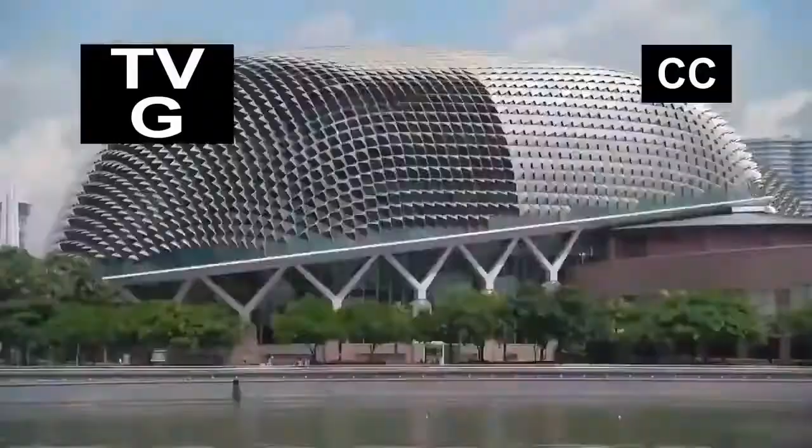I'm an architect, and I've spent years traveling the globe investigating incredible feats of architecture. And right now, I'm going to take you behind the scenes of one of the largest construction projects in all of Asia.

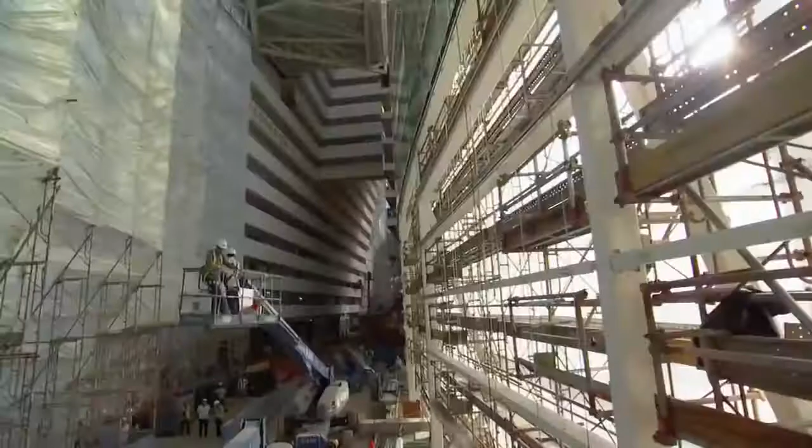Singapore is reinventing itself. This small island nation is attempting to finish one of the most audacious buildings on the planet. It's the country's first casino, 3 skyscrapers, covering 9 million square feet, and topped off by an engineering masterpiece, the first ever Sky Park. Longer than 3 football fields, with gardens, swimming pools, and restaurants, all higher than the Seattle Space Needle.

We're actually in the pool right now. We're in the pool. This is the view from the pool. Wow, it's pretty spectacular. That is amazing.

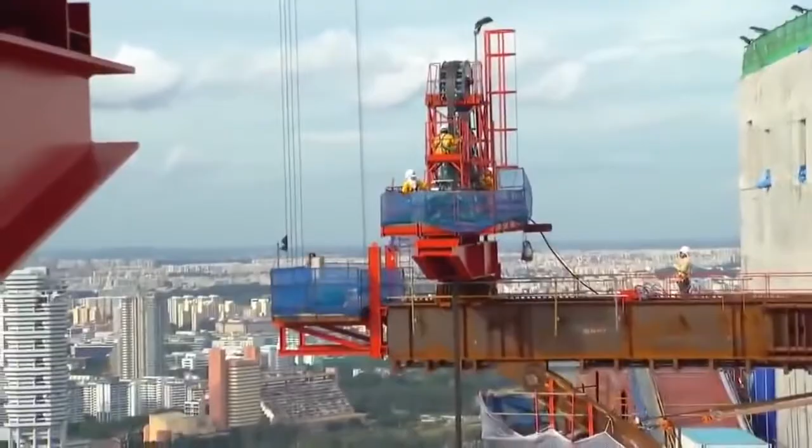To finish it, crews must perform some of the highest and heaviest lifts ever attempted. I mean, you're putting a piece of steelwork the size of an aircraft carrier on top of 3 towers. They tackle one of the largest paint jobs on the planet — you would never do this in America. And erect one of the longest cantilevers in the world, 200 feet out over nothing. Oh my God, that's enormous.

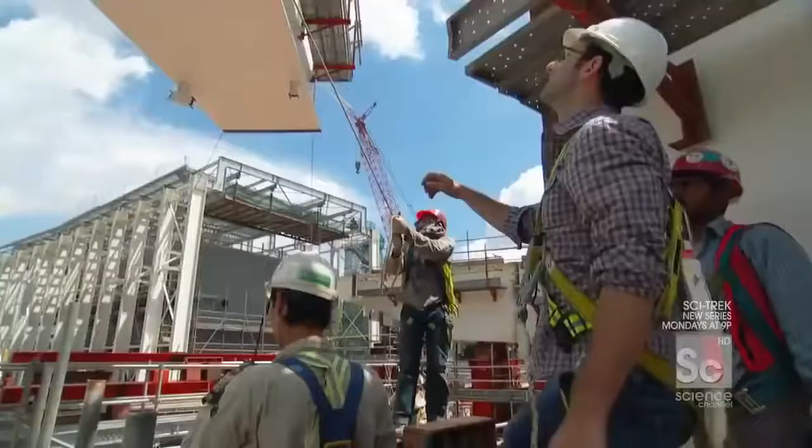I'm in Singapore, a tiny island nation with less than 5 million residents. In fact, the entire country is smaller than all of New York City. Located at the southern tip of the Malay Peninsula in Southeast Asia, the main island of Singapore is both a city and a country, one of the most densely populated in the world.

Culturally speaking, it's a somewhat strict and buttoned-up environment. Chewing gum is against the law. Insensitive behavior is punishable by fine. And if you're caught vandalizing a building, you quite literally get hit with a stick.

But despite this conservative cultural backdrop, Singapore is attempting to reinvent its image by doing something totally surprising. They're going to open a massive casino.

With no natural resources of its own, Singapore is risking $5.5 billion in hopes of cashing in on the gambling boom exploding across Asia.

It's a pretty significant gamble because for Singapore, you've never had gaming before at this scale. You've never had a resort at this scale. You're taking a kind of a major leap. Yes, it's certainly a transformational project for Singapore, where you hope to actually not just double, but triple the tourism receipts. That's big.

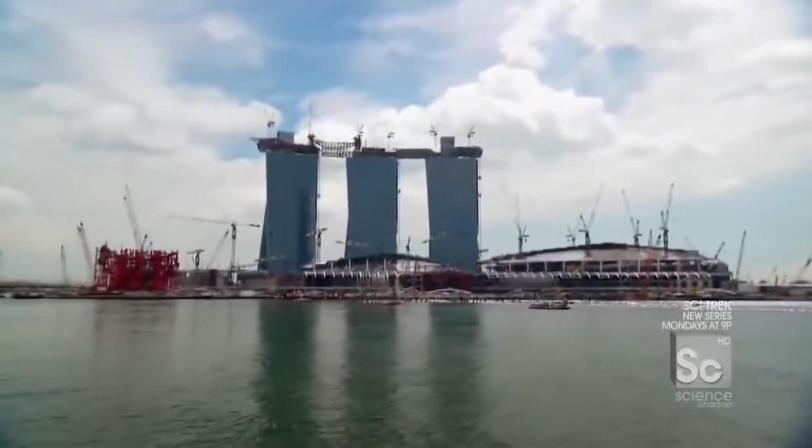The centerpiece of this giant transformation, the Marina Bay Sands. One of the biggest and most expensive casino complexes in the world. Unlike any hotel and casino ever built.

Rather than just being kind of a traditional hotel and casino that we might find in Vegas, instead, we have a museum, theaters, retail, a casino, a massive convention center, 3 incredible hotels, and all of that capped by the first ever Sky Park. That is absolutely right. The Sky Park on the very top will become the icon of Singapore, we think.

In a move that has never been done before, world-famous architect Moshe Safdie put a park across the top of 3 massive skyscrapers. An 1,100-foot-long urban oasis with tropical gardens and one of the longest swimming pools on Earth, all of it perched 55 stories above the ground.

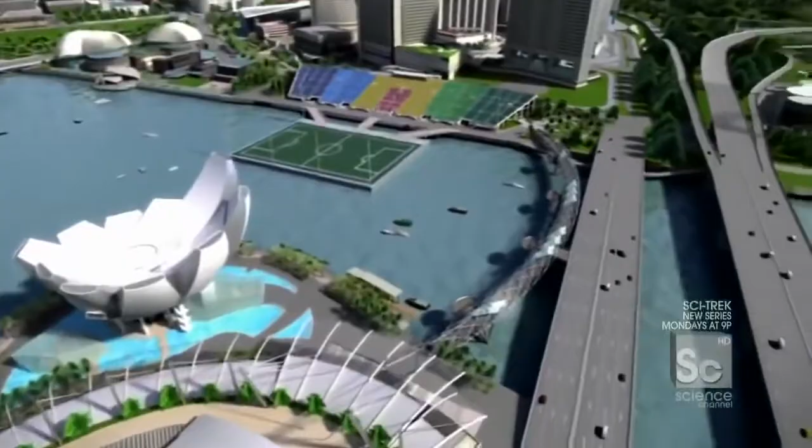So, Brendan, how do you describe a Sky Park to people? I mean, it's just a fantastic structure. I've never seen anything like it. There's 3 55-story towers, and you're putting a piece of steelwork the size of an aircraft carrier on top of it. So it's quite a feat.

And there's a park up there. There is. Well, there's more than that. There's observation decks and swimming pools and restaurants and all sorts of things. So it'll be a little city in itself.

The biggest challenge for builders: lifting 7,000 tons of steel, which is more than the main span of the Brooklyn Bridge, on top of 3 650-foot-tall buildings.

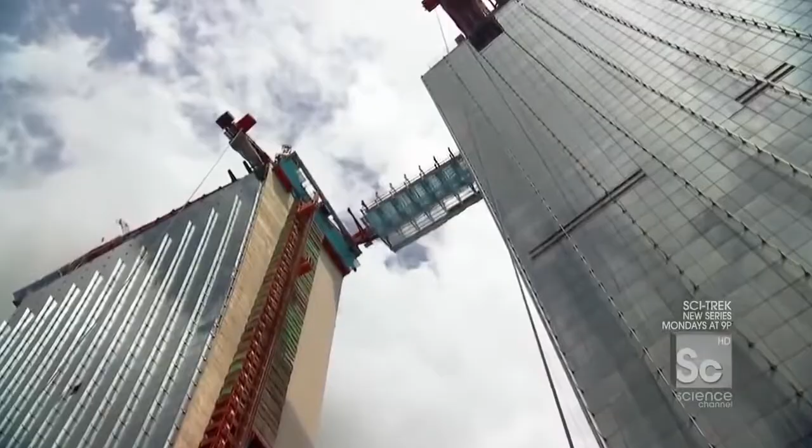To get it up there, the team divided the structure into 14 large but more manageable segments. 6 form the bridges connecting the towers, and the other 8 make up the observation deck, which sticks out 218 feet from the end.

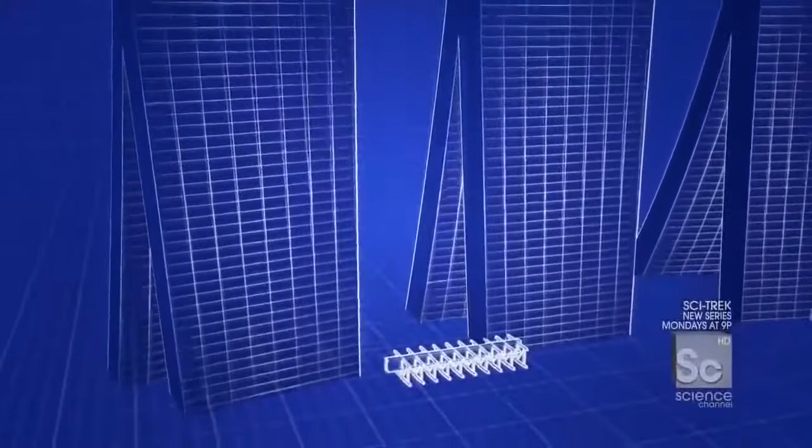And right now, crews are about to lift the second to last bridge segment, a massive 350-ton piece that will hang between towers 2 and 3.

It's a little after 7 p.m., and on most job sites, it'd be quitting time, right? Folks would be going home. But here in Singapore, we're about to begin one of the most critical lifts in the entire project.

That bridge segment right there, an over 350-ton chunk of steel, is about to get lifted up over 650 feet in the air.

I mean, in principle, this sounds crazy, right? Yes, we're actually taking a bridge, lifting it up, and putting it on top of 2 skyscrapers. This has never been done. Never done. So you got to be a little bit nervous to get this thing up.

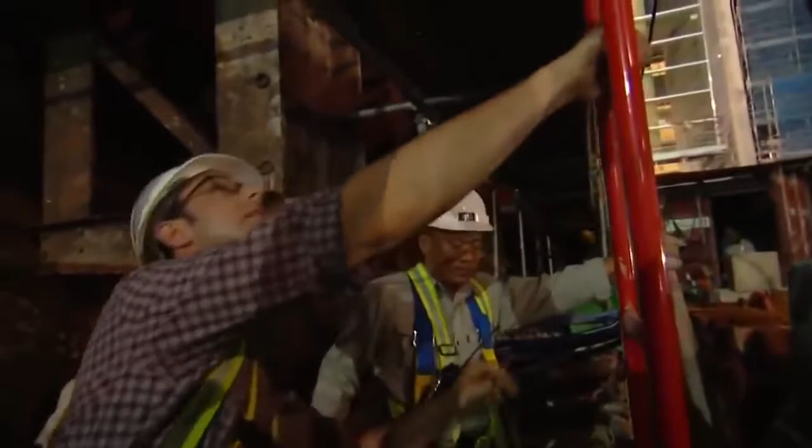Lifting this piece will take some of the strongest hoisting cables ever designed. They get attached to the very top of the segment, 5 stories up.

Now, at long last, I'm on the top of the whole bridge segment, and you really get a sense of its length. It spans all the way out between 2 full towers, over 150 feet long.

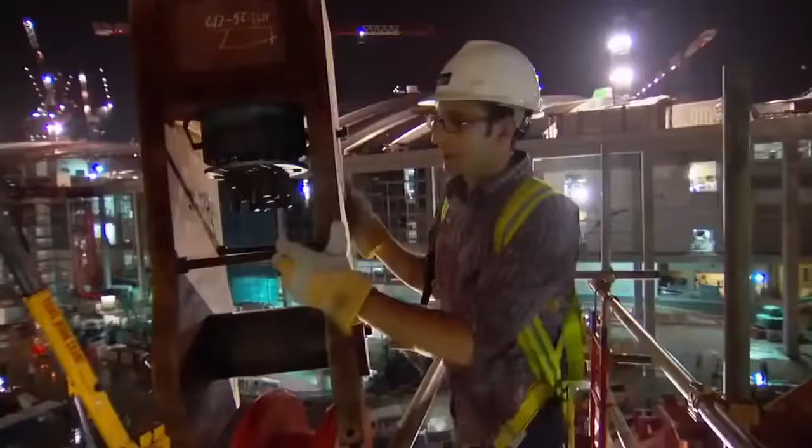This is what it's all about. This is the shackle coming down, over 600 feet up. Look at the amount of bound cables inside of this thing, just the density. It's 2 of these shackles, one on this side, one on that side. We're gonna lift up over 350 tons of steel.

An operator from the top of the sky park lowers the shackle down. There it comes, there it is. 960 millimeters. It has to line up within 1/10 of an inch for this 150-pound anchor pin to fit through.

Oh no, I'm stuck. Push, fight, come on, shake it a little bit. Hammer! Give it to me. Out here. You ready? Here I come.

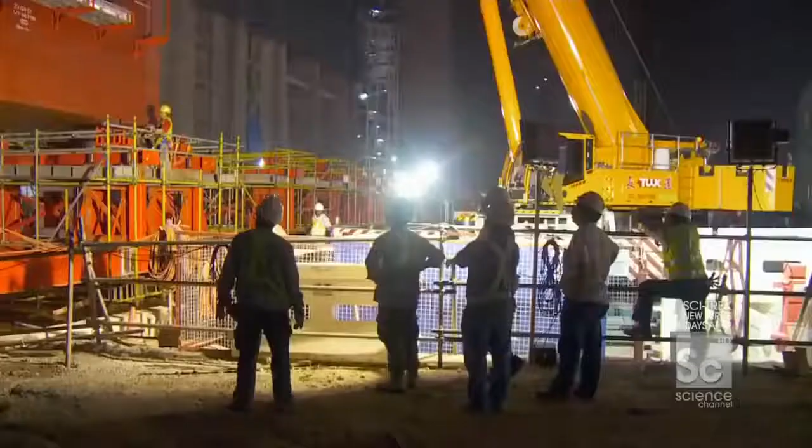Once the pins are pounded into place and the shackles are connected, there is one final step to make sure that the load is secure. Overnight, crews test the connections for 12 hours by hanging the segment just 4 inches above the support. If everything looks good, it is ready to go up.

Okay, she's floating. Yes, 4 inches off the ground. Ready for the lift? Yes.

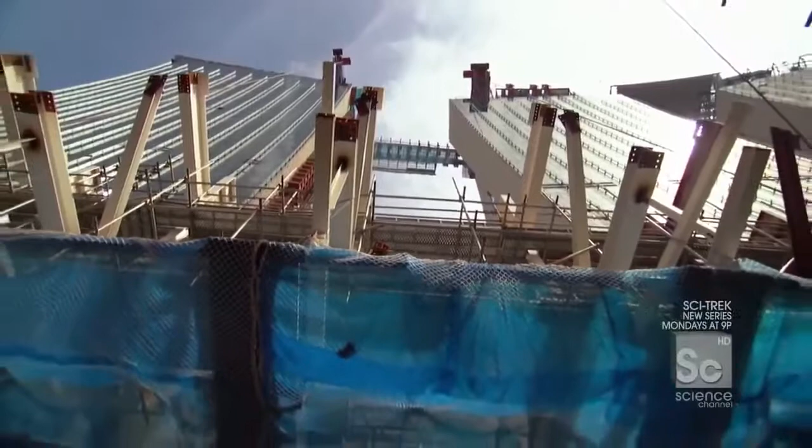How's the wind? If you can see it, it is swinging, and if it swings, it might hit the building. So when the lift begins, the concern is in a strong wind, like a pendulum, it could move and actually hit the building. Is it that close to the building? It is very close to the building.

Because of the curvature of the towers, this piece must pass within 10 feet of 2 glass skyscrapers on its way up. Any wind over 5 miles per hour is enough to call off the lift. So are we good? Are we ready? Yeah, good. So it's now okay to go.

Typically, crews would use tower cranes for heavy lifts, but this segment far exceeds their capacity. So instead, engineers are borrowing the technology from a different kind of construction: bridge building. Even the most powerful tower crane can lift about 20 tons. This thing weighs over 350 tons, not an option. So they went with something called a strand jack.

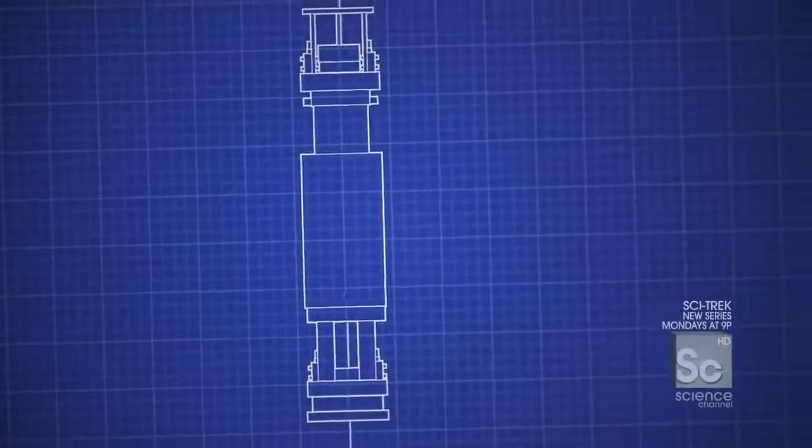To understand how it works, imagine 2 hands or clamps holding a rope. One hand locks the rope, the other brings the rope up, grabs the rope, goes back for more, and so on. Strand jacks work on simple hydraulics. A bundle of 22 half-inch diameter cables passes through 2 clamps. The top clamp grips the strands and moves up almost 2 feet. Then the bottom clamp locks the cables in place while the top moves back down for the next pull-up.

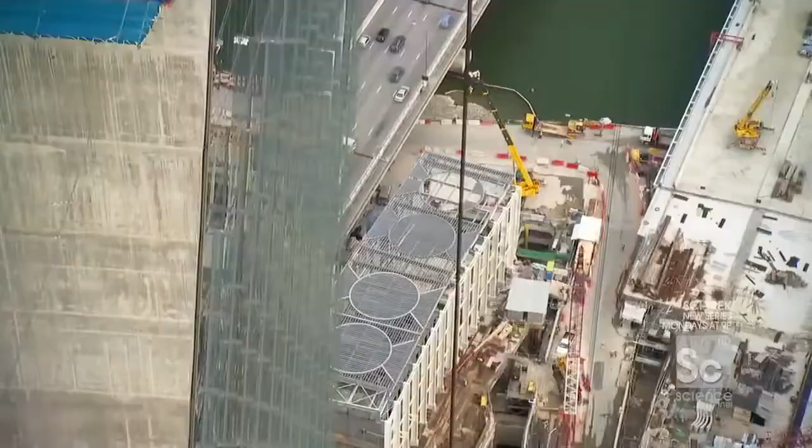It takes 2 enormous strand jacks to lift this segment, one on each tower. Combined, they could lift the Statue of Liberty. It's the first time this technology has been used to make lifts this heavy from the top of a skyscraper.

Tony? Danny. Welcome, Danny. Good to meet you. Good to meet you.

Tony, where am I standing right now? Well, you're on the Sky Park. So this is kind of where the action is. This is where the pool is. Right where we are now is the second swimming pool. We're actually in the pool right now. This is the view from the pool. Oh my God.

People will be able to swim out to the edge of the pool. And literally, there'll be no edge, right? It'll be an infinity edge looking out over Singapore. Wow, it's pretty spectacular. That is amazing.

And what's making all of this happen is this really just nasty-looking beam. That's right. So this enormous frame is supporting the strand sliding units.

Now, can we actually head up top to the strand jack? Yeah, we can. Let's go this way. The strand jack sits on a temporary support structure that extends 30 feet out from the side of the tower. So Tony, where we're walking right now, we're actually leaving the skyscraper below us and now heading out. We've just walked off the edge of the building.

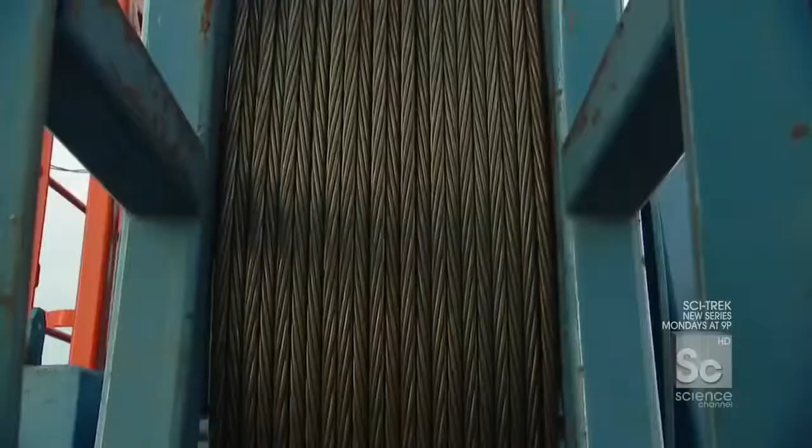So we're now standing perched out. There's no more skyscraper below us right now, there's no building below us. It's awkward. It takes almost 30,000 feet of cables to raise the segment, enough to cross the width of Manhattan. And if any of them get tangled, workers cannot lower the piece back down. So one of the most critical jobs on site falls to the cable manning crew here at the highest point of the sky park.

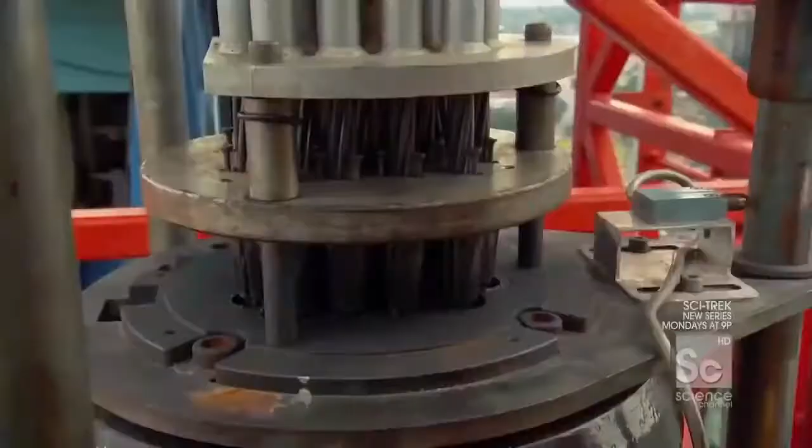Okay, so I am now standing at the very top of the strand jack. And you know that because right here, this is it, this is the top of the cables. And what we're about to do, every 30 strokes, they stop everything, clamp the lift, and spray some lubricant inside to make sure everything moves real freely. Unfortunately, I'm getting tasked with that role right now, so what do you got, some WD-40 we're doing this with? Look at this guy. Why is this the most low-tech thing in the world?

Okay, so now what we've done is we've taken the collar off, we've lowered the jack down, now we've exposed the cables to give us good access for some good greasing. Okay, Romley, how do you grease it up? Spray and pull out. Put in, spray, pull out. Go in, spray, pull out.

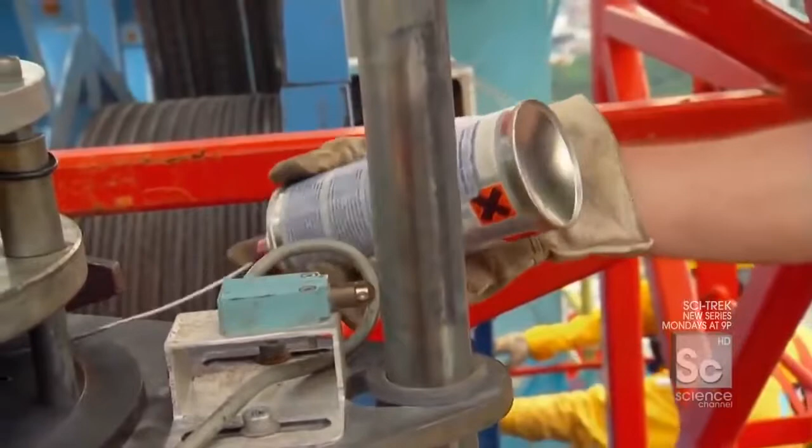You know, it's sort of humbling to have to climb up to this point, to have that behind you, to have to take a spray can like this, stick in, spray, pull out. These guys have to grease these cables once every hour for the entire night to get this segment up the final 500 feet to the very top of the sky park.

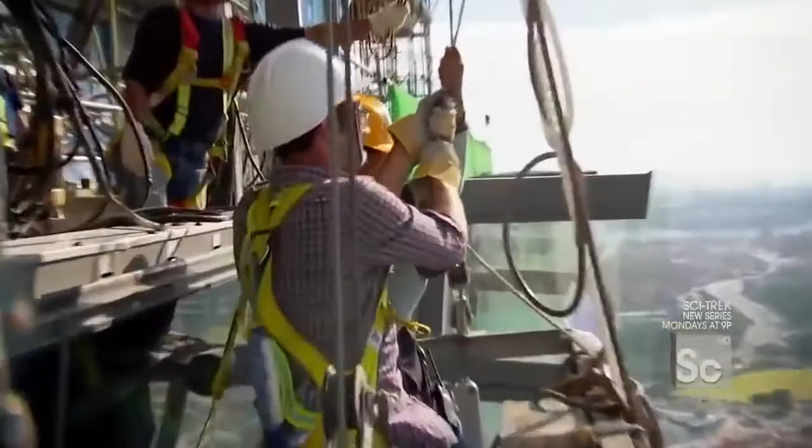Coming up: a one-of-a-kind solution to fight Singapore's intense sun puts up a fight of its own. I'm gonna pull you right outside of the basket.

Singapore is just 14 miles long. And with literally nowhere else to expand, this tiny island is increasing its footprint by actually filling in the sea, creating almost 1,000 acres of land on which to build an entirely new downtown.

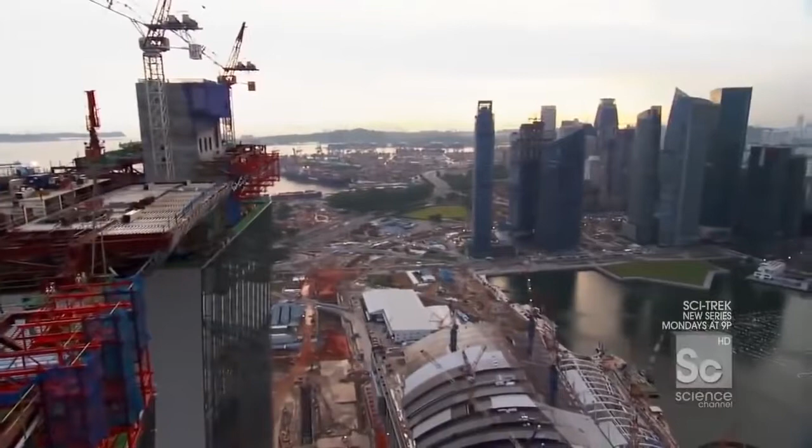So tell me something, if I was standing here 5 years ago, what would I have seen there? Well, 5 years ago, you wouldn't see the floating gallery, you wouldn't see the wheel, you wouldn't see Marina Bay Sands, neither would you see the financial center. So this is a radically different skyline in just 5 years' time. Yes. Singapore's evolution involved 30 years of land reclamation, followed by 5 years of construction, all culminating with the Marina Bay Sands. So 5 years ago, this would have been called the old downtown of Singapore. Yep. And now with the Marina Bay Sands completed, this becomes the new downtown. Yes, absolutely.

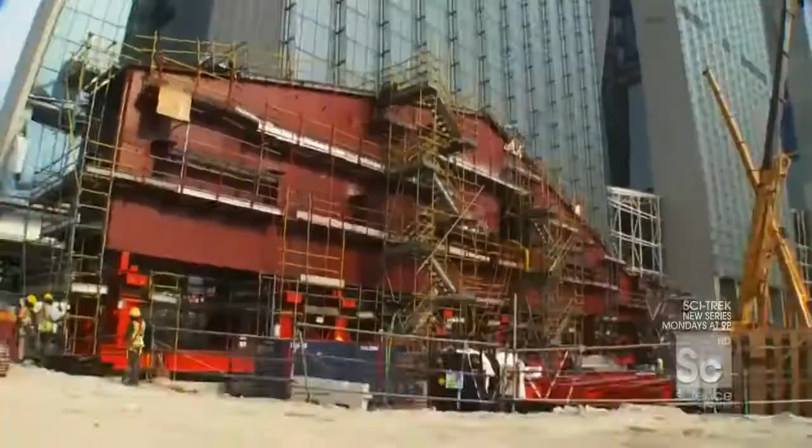The Marina Bay Sands' 3 hotel towers will offer guests phenomenal views of Singapore's new downtown. But they also had to be a stunning centerpiece for the city's redevelopment. So, to define their curved silhouette, the architect clad the tower facades with 1,900 glass fins, which also perform a key functional role for the building. The western face of the towers gets the most intense afternoon sun, so when the light hits the fins, they actually deflect the sun's rays, casting a shadow that reduces the heat on the hotel rooms by 20%, while still enabling clear views of the bay.

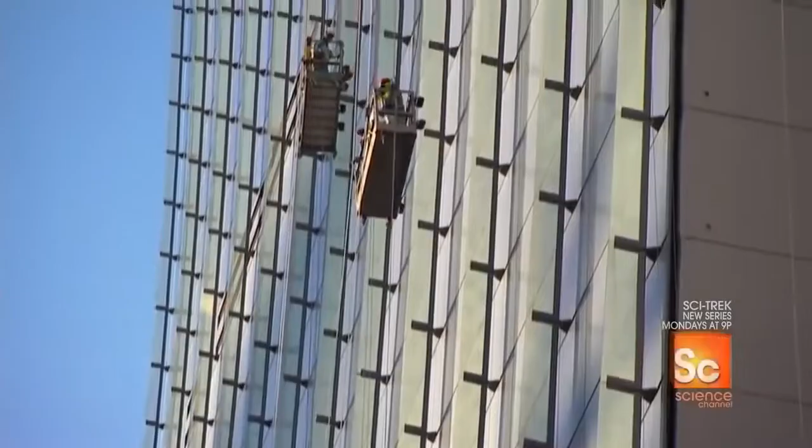But this distinctive design feature is also one of the most difficult to install. I think today is gonna be one of those days where I go and do something that I kind of think I shouldn't do, but in the name of really understanding how it is they build this building, we're gonna do it anyway. I'm gonna take you in a gondola up the side of a building almost 600 feet to install glass fins. And the guys who are going to help me do it are right here.

Terry? Hi, Danny, good to see you. David, how are you? Danny, good. Not bad. What are we up to, fellas?

We're actually going up to the top. Basically, we're going to install the last fins to Tower 1. And these fins are actually hanging perpendicular from the facade of the building. That's correct. Each fin is 10 feet tall and weighs 400 pounds. They're hung in straight vertical lines, protruding up to 4 feet from the side of the tower. Because the facade actually curves outward 5 degrees at the top, there would not be enough clearance for the Sky Park lift to pass by.

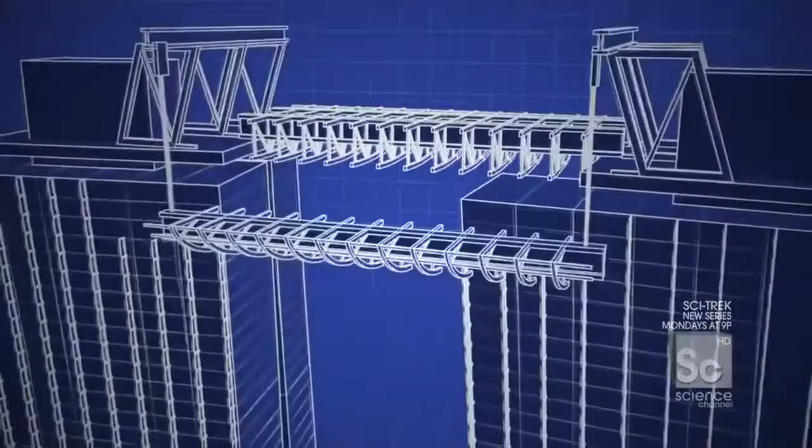So 12 fins in the upper corners of each tower were left off until now. So this is it, we are closing up the curtain wall of Tower 1. Yes, big milestone. Big milestone. All right, take me over to my maker. Let's do this. Okay, no problem. Lead the way.

Terry's crew installed the fins from a 6-foot-long gondola hanging off the side of the building.

You gotta be kidding me. It's basically the size of a bathtub, swinging from 2 sets of 650-foot-long cables tied to the tower.

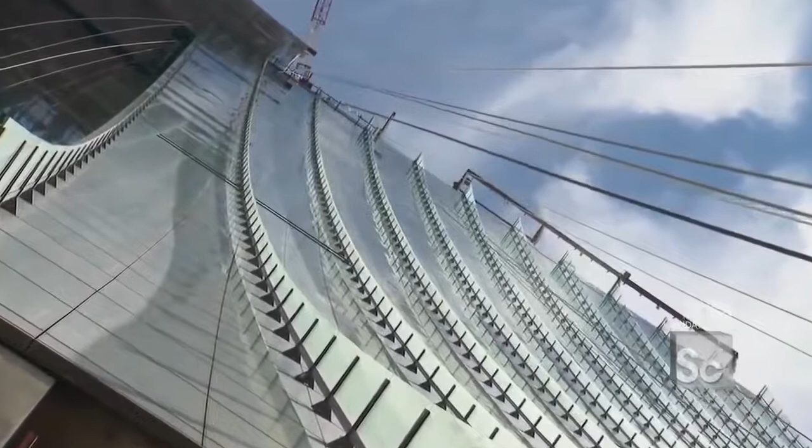Just gonna hang some glass with my boy Jay. 600 feet in the air. Right, man? Give me some skin. Buddy, we're gonna be great.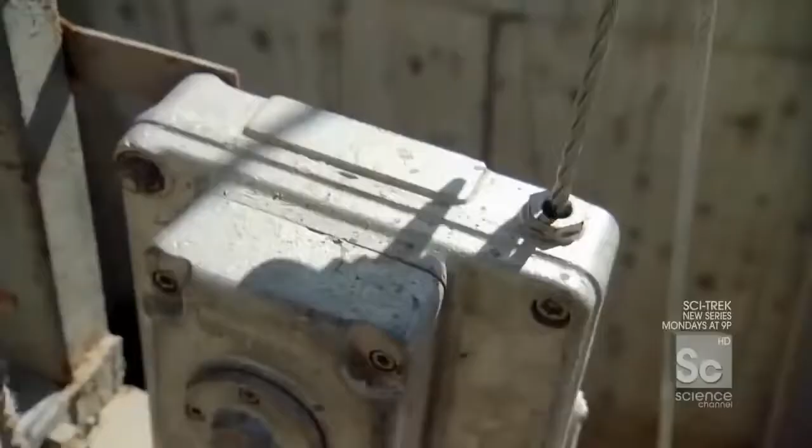Here we go. The gondola travels at just 0.2 miles per hour. Here I come, moving along, just moving along. So it'll take me more than half an hour to reach the top. Oh my God, this gondola looks like it was built by the Unabomber.

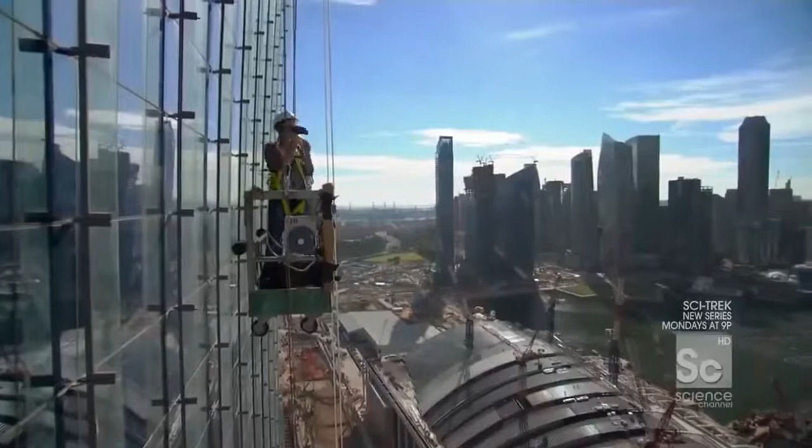Sometimes I don't really feel like I give you exactly what's going on for me right now, so I want to give you a little taste of what I'm seeing. There's a fantastic view of Singapore. There's Jay, my chatty friend. And there is not a good situation. All right, we're almost near the top, and you can tell because the building is beginning to bend back on itself and get closer to me.

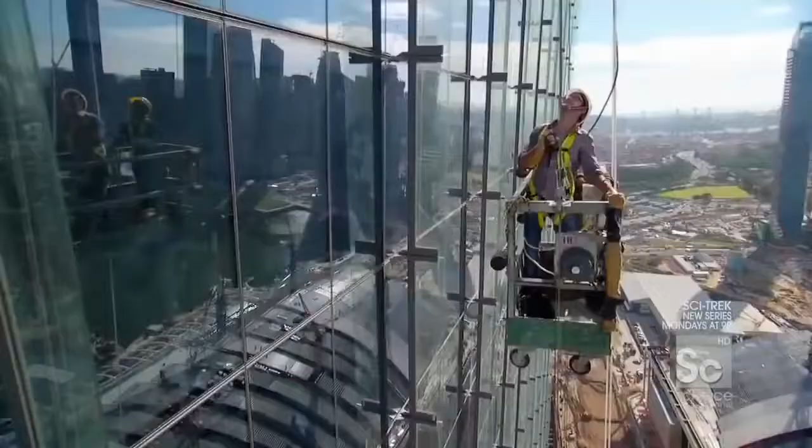Check it out, we're about 80 feet from the top of the building, and if you look up you can actually see the missing glass panel. As I approach the top of the skyscraper, they're prepping the glass.

There she is. Oh, the wind is really moving up here. That looks safe. Hey, fellas! How are you? Nice weather, huh? Okay, this is something you don't see every day.

I'm outside a skyscraper, and right here, right now, I am touching the top of the building. We are on top of the skyscraper. All right, who's ready to install some fins?

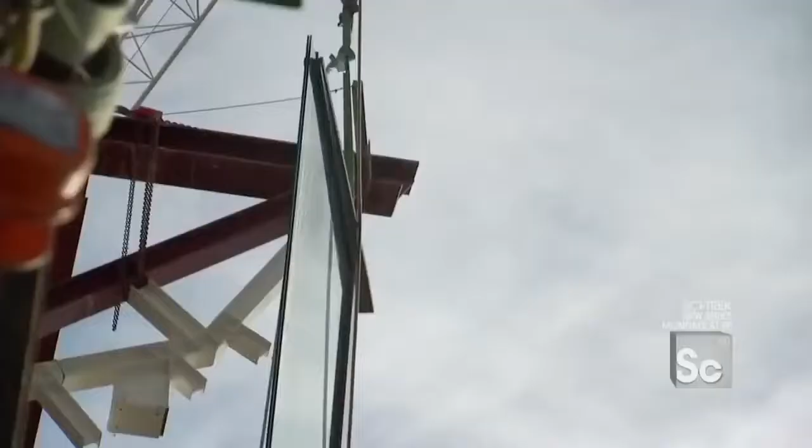Each fin is a custom-built pane of solid glass. I've got the line, hang on. On a calm day, they are extremely difficult to manage, and the wind is blowing this thing out. Give me a hand, give me a hand. But on a day with even a light wind, the task is almost impossible.

Hang on, you thought I was gonna pull you right outside of the basket. Hang on, give me some help. I'm not kidding, every time you get a little gust of wind I can feel my feet getting cold. There she is, slowing down.

It's basically like a big double laminated glass sail, and if the wind catches it, it moves. Okay, let it come down a little bit more. The fin can swing up to 20 feet while attached to the tower crane.

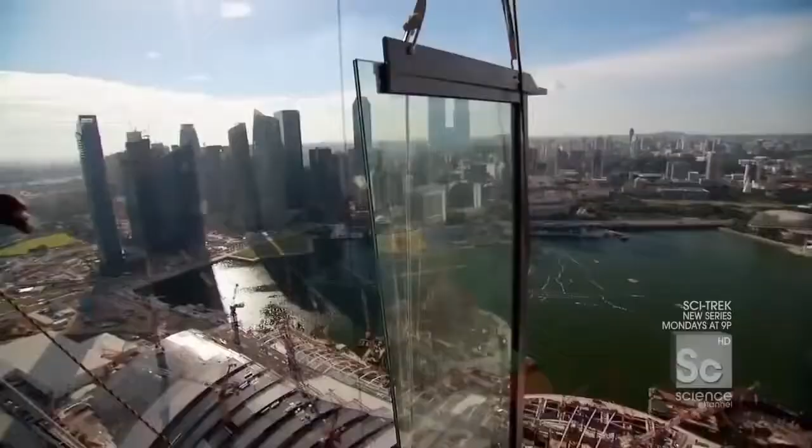Coming this way, okay, watch out. Someone help him. That's just too dangerous for the final installation, so the team has to transfer it to a more precise chain block mid-air.

Whoa, hold that side, hold that side please. All right, so this is it. What we're doing right now is essentially taking the load from the crane and transferring it to that chain block. Are we in? Okay, I think we're set.

This is another one of those moments in my life where I say to myself as an architect, did you really need the fins? Did you have to have fins? The building would have been fine, you know?

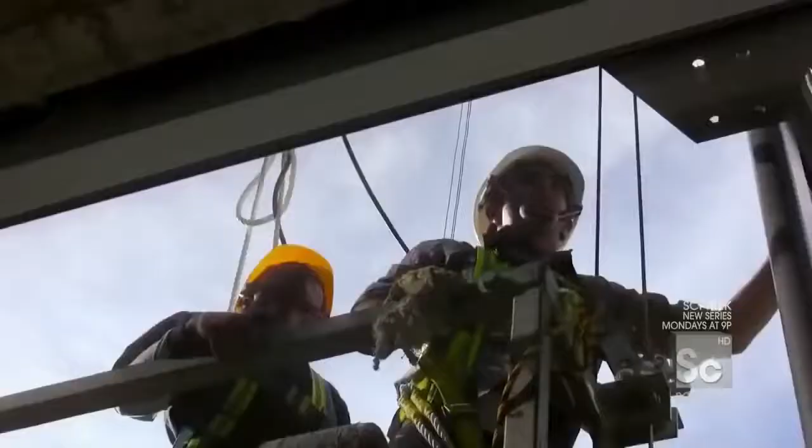Okay, gondola down. The fins are designed to clip into each other at the bottom. Need you now, Jay. But here, at the very top connection on the highest fin - oh boy, this is gonna be a nasty one - it gets locked to the building with bolts.

Okay Jay, 4 bolts, give me your thoughts. 1, 2, 3, 4. Are we good? Come here, bring it in, I need some, give me, come on, give me it babe. I need some. There it is. Okay, that's right. 4 bolts locked in, lined up.

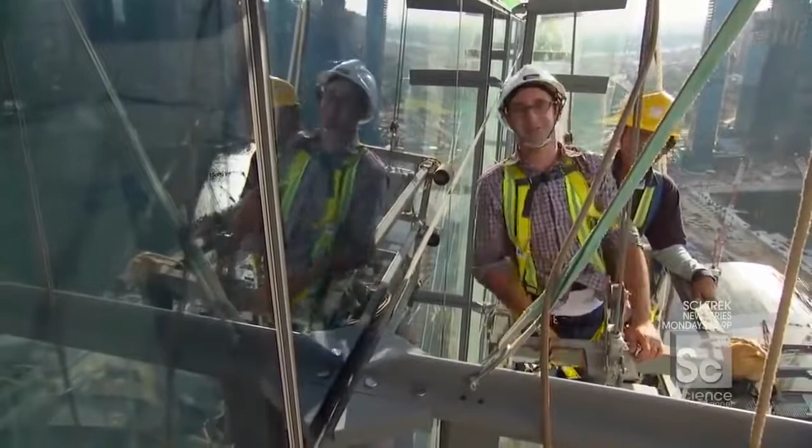We, Jay, are done. Can we go home? Home, home - that much he understands. Let's get out of here.

Up next, building one of the longest and highest cantilevers in the world, jutting out more than 200 feet over nothing. Oh my God, that's enormous.

Singapore's new Sky Park is the first of its kind. A steel structure longer than an aircraft carrier, on top of 3 skyscrapers taller than the Seattle Space Needle. On the northern end, the architect took this innovation one step further, creating the longest cantilevered observation deck in the world. It's the biggest and heaviest section of the Sky Park, and it hangs out 200 feet over thin air.

When it's done, the Sky Park is going to look to the eye like one 1,100-foot-long continuous element. But the reality is, it's actually made up of 2 very different structural conditions: bridges on the one hand, and something called a cantilever on the other. Spanning between towers 1 and 2, and towers 2 and 3, are 2 bridges, basically acting like tabletops. The force goes from the bridge, transfers into the towers, and down something called shear walls into the foundation.

Now, the cantilever is a different story. A cantilever, by definition, is a load supported on only one side. So what you have here is a 218-foot-long span, almost like a diving board, perched out over nothing. Intuitively, that load wants to just twist off the building.

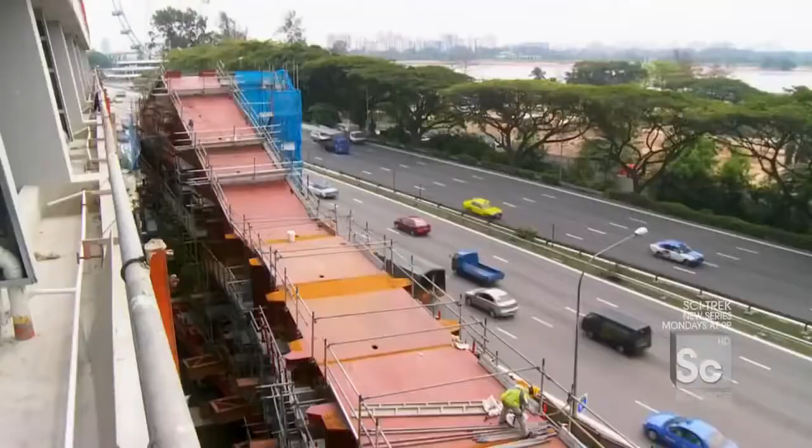So to keep it down, they've put not 1, but 2 700-ton backspans holding down the cantilever. The 2 backspans weigh as much as a fully loaded freight train, but that weight is critical to balancing out the cantilever, which will jut out longer than a 747 from the end of Tower 3.

There are 860 tons of structural steel that make up the 218-foot-long enormous cantilever. It is so big that they actually assemble the entire unit here on the ground before sending it all the way up there. The cantilever is just too big to be raised in one single lift.

Instead, it's divided into 6 segments. Once they're 650 feet in the air, crews will have just 1 shot to fit them together. So before the segments can be lifted, they're assembled on the ground to be sure that each connection will fit perfectly.

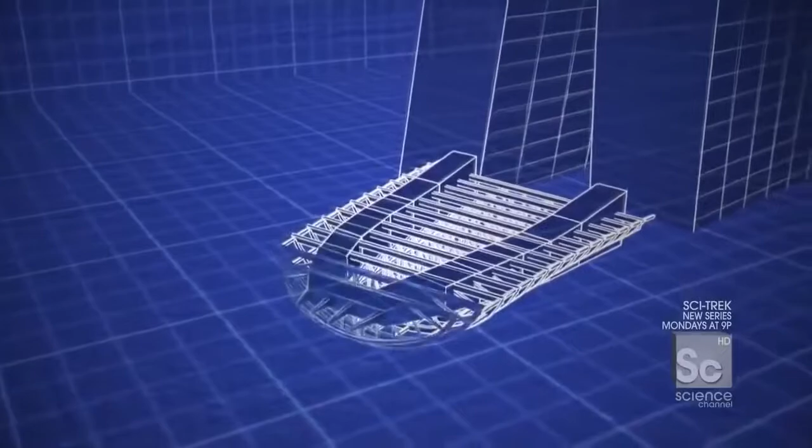So these pieces behind me represent the very final pieces of the cantilever to be assembled here on the ground. So once we get this and this bolted onto that massive cantilever, the lifts can begin.

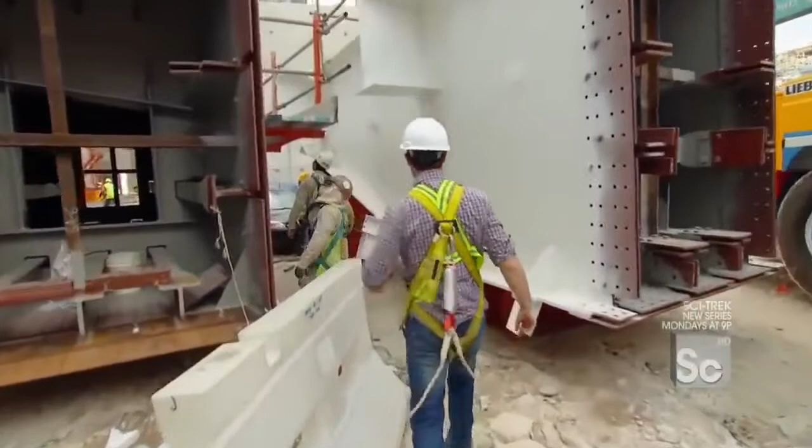So the crane's now setting the shackles up. We're going to go on top of the piece to connect it. The piece we're attaching today is 12 feet tall, and it weighs 30 tons, as much as 2 Mack trucks.

A crane will lift it over to the rest of the cantilever using 4 extra-large shackles. Viram's now tightening up this shackle. So shackle number 1, 2, 3, and 4 are all connected.

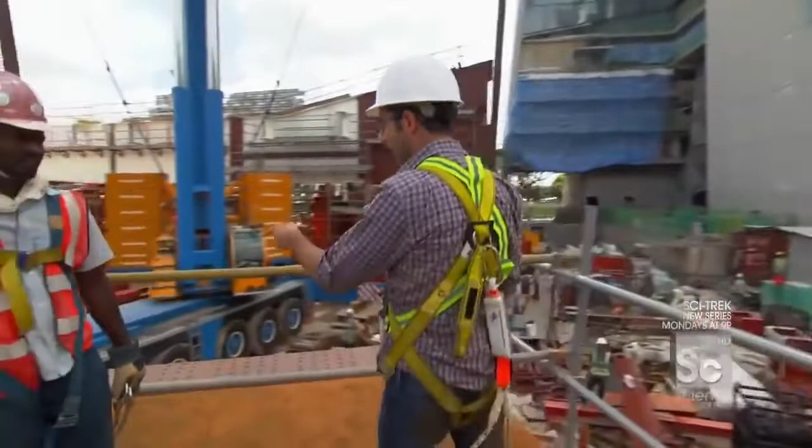The next step is to take the piece that I'm standing on, lift it up, and extend that cantilever another 50 feet.

You ready? Knuckles? Knuckles! All right. You ready, Knuckle Man? Knuckle Monster, you got it. Nux Magoo, come over here for that. Bang! We are ready to go. Okay, I'm ready.

So what they've done is they've just put a bit of tension in the line, lift the piece just off the ground to make sure the shackles look nice, and they know where the center of gravity is. Are we good? Are we ready? Yeah, all right, let's go. She's off. Out of our hands. Now the crane's got her. He's gonna swing her all the way around this way.

What's really worth noting is as you look at this thing, this massive floating piece of steel, it's not but a small fraction of the entire cantilever that's going up there. Even with 1.5 million pounds of steel, this cantilever will still be susceptible to the problem facing all structures: movement.

All buildings, all bridges, even all cantilevers have a natural frequency, meaning they move ever so slightly. Now, if the movement of wind, or the movement of people even, starts to align with that building's movement, it can combine and collaborate and literally shake a building. So when the engineers were designing the cantilever, they had to be concerned with not just how many people stood on the edge, but also how they were moving.

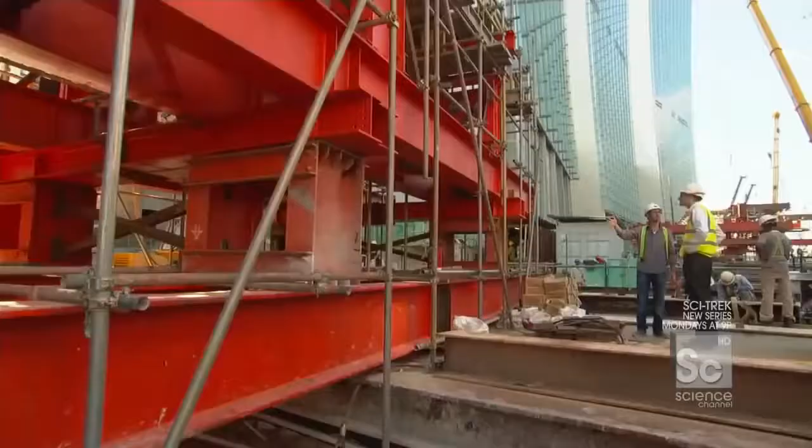But if you get 100, 200 people all jumping up and down at the same frequency, then it can actually excite the cantilever and you actually start to feel it. It would take hundreds of people dancing to the exact same motion. Like the Macarena, yes, that's right.

And believe it or not, our dynamics engineers have iPods with thousands of songs in them that actually have the frequencies of all of these songs. So once we find out what the frequency is, in theory you can say you can dance the Macarena, but you can't dance the bus stop or whatever else. So some engineer is doing intense load calculations, solving the fact that this thing can take the electric slide but cannot take the achy breaky heart. And they know that in advance, and it's been designed. More or less, yeah. Imagine the party, if it's going great, a big wedding, and all of a sudden someone puts on the Macarena and it's like, no!

Now that the piece has made its way over to the rest of the cantilever, the next major challenge is lining this giant segment up for attachment. So the piece is now literally sitting right on top of my head. Just imagine, on top of this incredible white long piece of steel will soon be a garden, a pool, and a dance party.

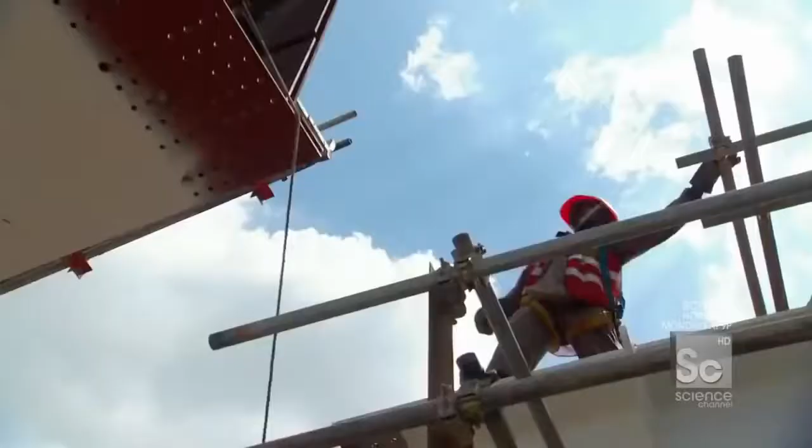Slowly got it down. Something incredible about lifts like these is that the first 99% happens almost instantly, and now it gets down to the details—pushing it, pulling it a matter of inches, to get all of these holes lined up, to get the bolts in, and take the load off the crane.

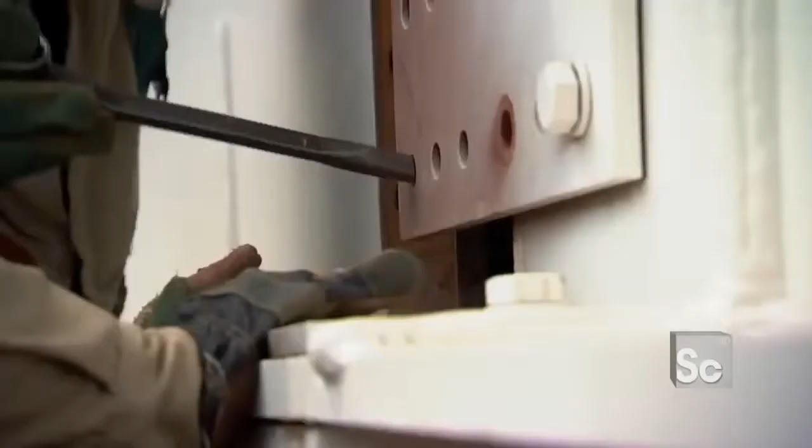Once the piece is in place, the crews have to line up all 1,500 bolt holes. There are so many bolt holes. They'll connect about a third of them here on the ground to make sure everything fits together before liftoff, because there are no second chances once this piece is airborne. This is how one fits into the next piece right here. You have these two plates on top, and they're sliding over top of the previous cantilever piece.

Here it is, it's coming in, it's coming in. Once she's there, we'll put this pin in to lock the piece together so we can release the crane and move on. About 2 inches. Just about there, just about there. Okay? Yeah, use the hammer. The pin secures this new piece to the rest of the cantilever, so bolting can begin.

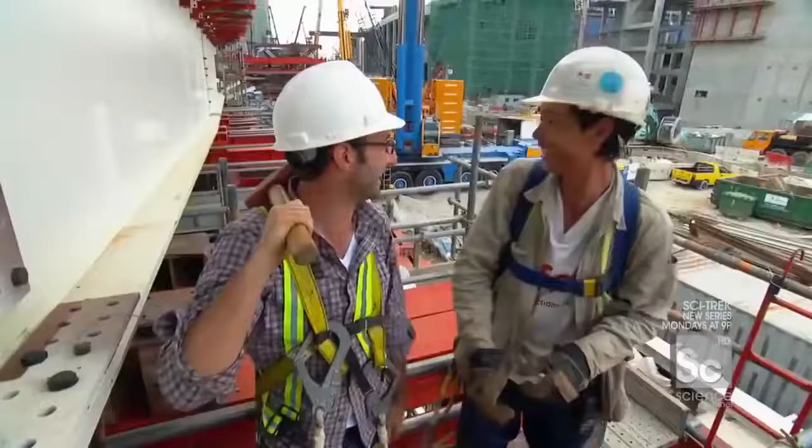Man, I never do that. Usually I break a finger and knock some steel at the thing and almost break the hammer most of the time. I knocked the crap out of that thing.

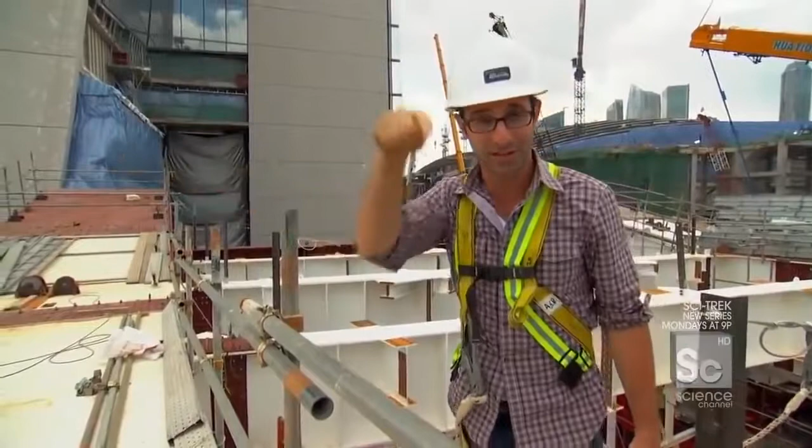Well, as you can see, the piece is in its final location. And now from where I'm standing, I think you can really get what this thing is: an 860-ton, 218-foot-long steel diving board that's going to be perched out over 600 feet in the air.

And coming up, a hotel like no other, with a lobby bigger than a cruise ship wrapped in glass. This is probably one of the most spectacular corridors I've ever seen.

But first, what is the maximum number of people the Sky Park can safely hold at one time? The answer after the break.

The answer to the trivia question: 3,900 people can safely be on top of the Sky Park, but only 900 of them can be on the cantilever.

Singapore is the gateway to Southeast Asia, and for the past century its economy has depended on its location as one of the world's busiest shipping ports. But this city is in the midst of a makeover. When the Marina Bay Sands opens later this year, Singapore will instantly become one of the largest gaming markets in the world, putting it in the same league as Las Vegas, Atlantic City, and Macau.

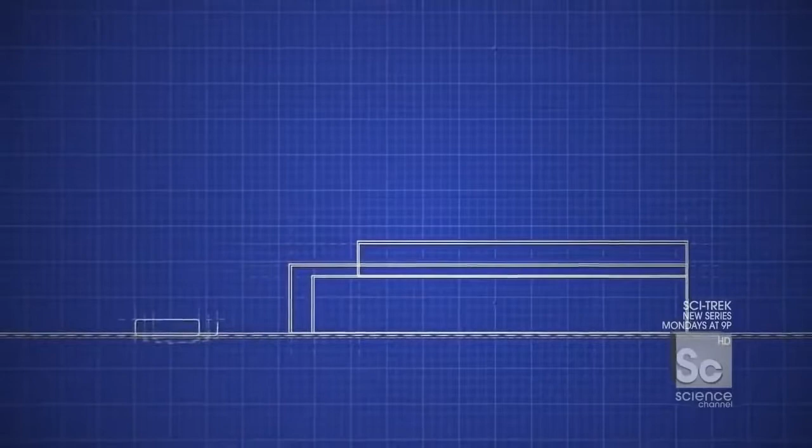When Macau opened their casinos, they looked to the past for inspiration—you have the Venetian in Las Vegas, you have the Venetian in Macau, a carbon copy, only bigger. But here in Singapore, a country so focused on image, they didn't want to mimic what came before them, but instead are trying to literally reinvent the idea of a hotel casino. The difference comes down to design. The typical casino model involves a giant gaming floor with a flashy attraction out front and a hotel connected in the back. But with the Marina Bay Sands, the architect actually separated the hotel from the casino and relocated the attraction on top in the form of a sky park.

From my perspective, when I think of a hotel and a casino, I think of a ginormous casino, a tall hotel in the back, and basically not being able to check in and go to my room without passing a blackjack table or a slot machine. This doesn't follow that model.

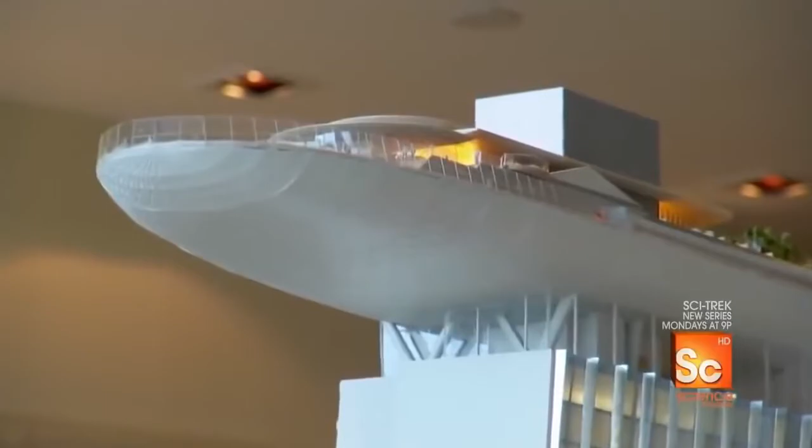It does not. Singapore has a very particular vision as to how they want the gaming component to work. What we built here was not something that was casino focused. It was all of this. So the casino is part of something far grander. And key to making that happen is not just building a set of normal, typical expected structures, but instead to do something like that. Correct.

This revolutionary design carries over to the hotel towers themselves. To create a hotel lobby like nothing before, the architect actually split each building apart for the bottom floors, creating one long tapered space linking the three separate towers together.

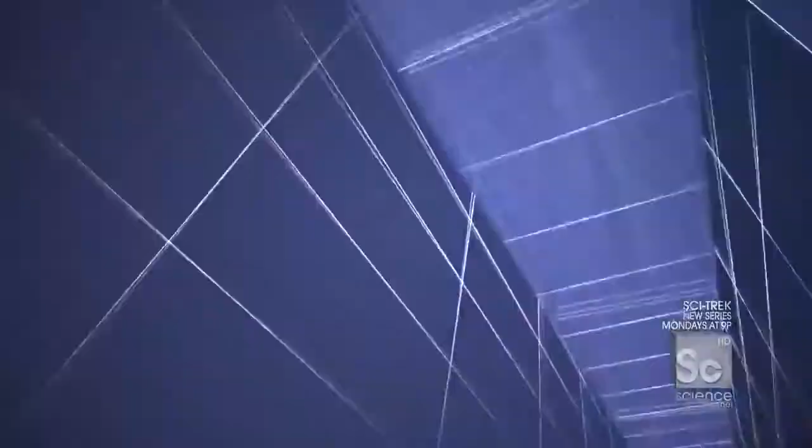The three hotel towers are all connected by one long continuous atrium, and that atrium is covered in glass. These massive 9-foot-long panels that we're about to take from down here and install right up there. 3,500 individual panels will hang throughout the atrium, transforming this space into one 850-foot-long tube of daylight.

So Terry, once the scaffolding comes down behind that glass, this whole chamber is going to be just awash in light. Yes, that's correct. And these spaces literally link all three hotel towers and let you look from one end of the building all the way down to the far end. That's correct. So this is more than just a kind of connective hallway from one hotel to the next. It's not just a corridor. This is not a corridor. No. And if it is, it's probably one of the most spectacular corridors I've ever seen.

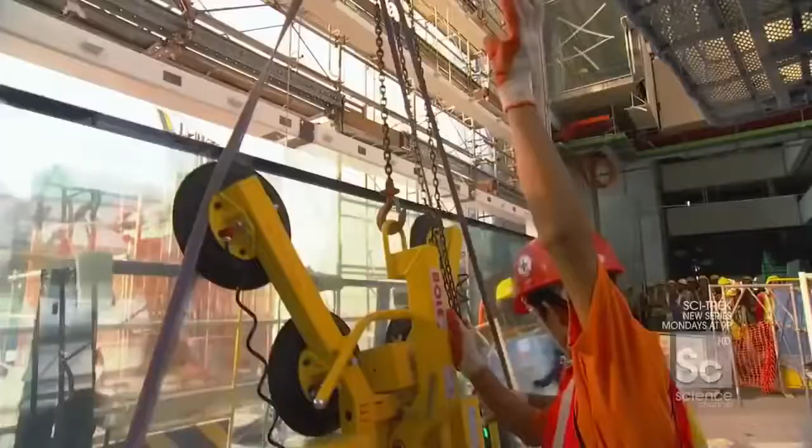Correct. The atrium glass is a key part of the tower design, but it also plays an important functional role in sealing up the building. With hotel guests arriving in just 6 months, the delicate job of hanging all that glass needs to happen quickly.

Now, why is it so important to get the glass on the atrium and button up the facade? The vital bit is we actually have to make the building watertight as quickly as possible to enable all the final finishes to commence on the inside. So all the sheetrocking, carpeting, wallpaper, painting, that sort of stuff can't happen if moisture can still penetrate the building.

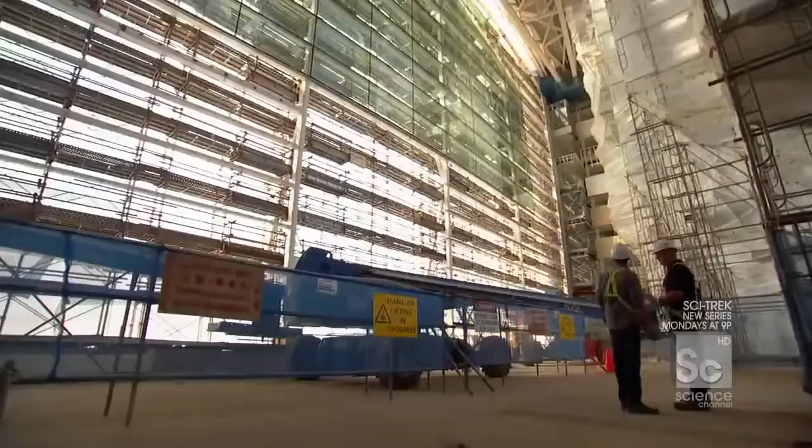That's correct, yes. So today we're going to be headed, where, up there? We're going up to the top and we'll be installing the top piece of the glass. So we have a big task ahead of us, either way. To finish the atrium on schedule, Terry's team has to install 100 panels a day, about 5 every half hour. So here the guys are, they're just getting the glass ready.

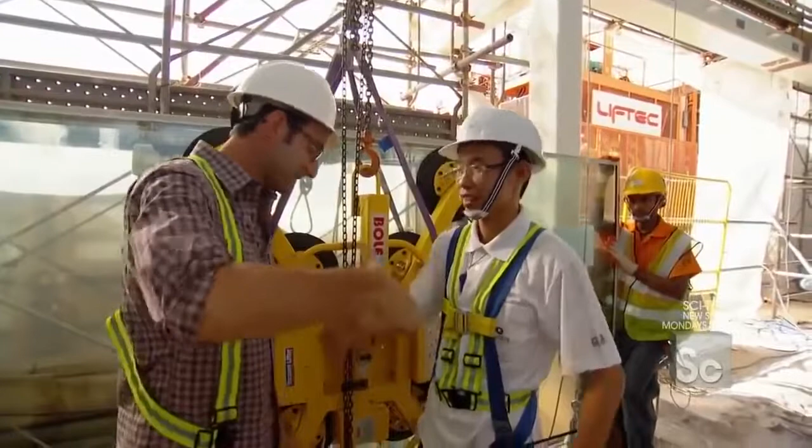A task requiring 8 international teams of glazing specialists. Hello, teams sir. I'm Y. Nice to meet you. So Y, you're one of the installers? Yes. And you've been installing glass how long? Over 10 years, my experience is over 10 years. Yeah, my experience is almost 10 minutes. So this is going to be a very good team. You and me together, master and apprentice. Are you ready? Yeah, I am ready. Let's do this. Let's hang some glass. Y and Danny? Why? Because they said so.

Let's do it. We're installing the 3rd highest panel in this section of the atrium, more than 100 feet from the ground. Safety harness? I want you to be safe the whole time.

In addition to Y and me, it'll take 10 other workers to install this 550-pound panel. The crew on the ground applies suction cups to the glass and then sends it up on an electric hoist to meet the crew in the air. Here it comes. Check it out. And waiting for me. Hello, my brothers! You guys ready to rock and roll with myself and Y? Ready? The big team. This is it. This is the Singapore Glass Stallions.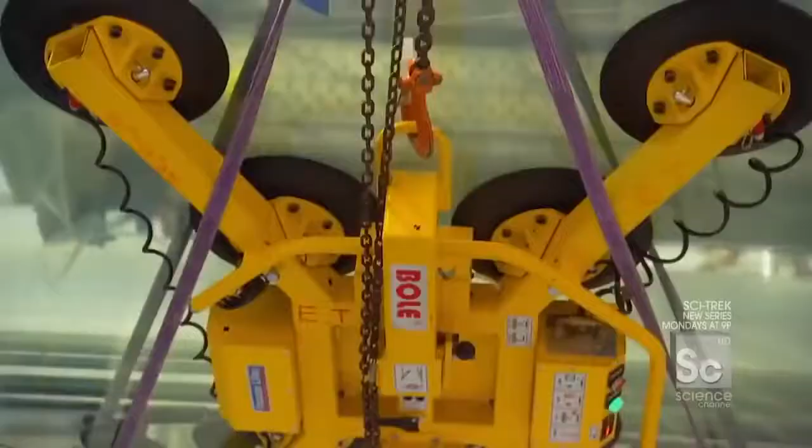All right, here it comes. It's a big piece of glass, huh? What are we doing? What's the first step? The first step is we need to take off the handle. So I'll take off that side, you take off that side? Yeah, take off only the handle, turn only. All right, I don't want to drop it though.

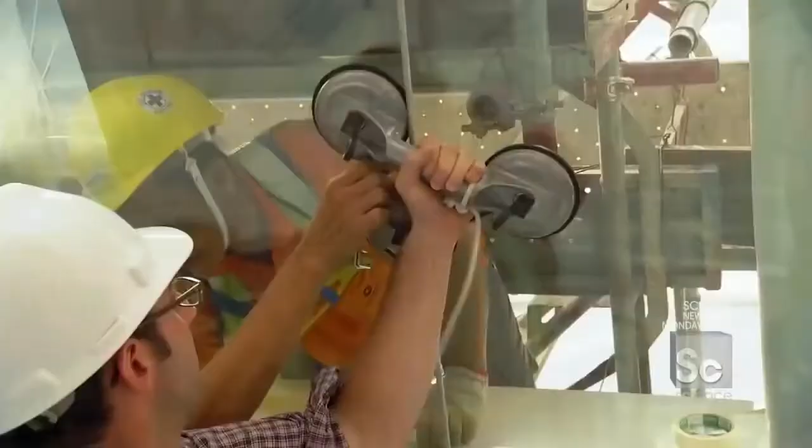The panel is supported by a backup system of smaller suction cups to help guide the piece on its way. Let go? No, it's too scary. I'm not going to do it.

Okay, I did it. And just like the glass fins outside of the towers, we'll finish maneuvering this panel into place with the chain block. The chain block has lifted the glass panel to just about the height of the previous panel. So the next step is to push it in and get it locked into place on the brackets.

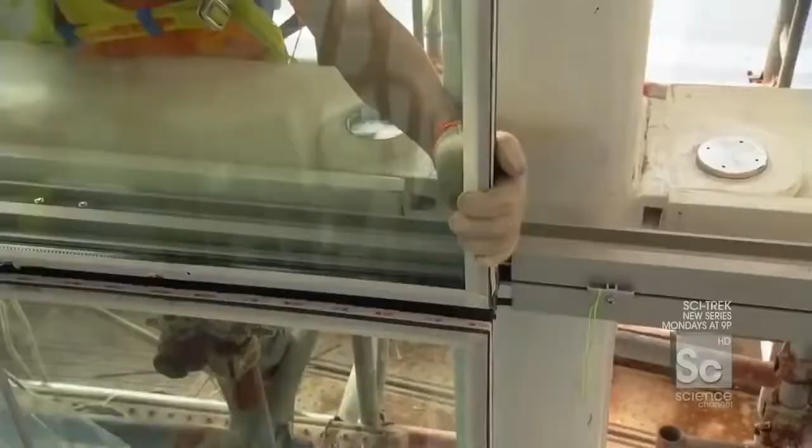Should we bring her in? The interior work for the hotel cannot get started until all the atrium glass is hung and the lobby is watertight. So to speed up that process, 20 attachment brackets come pre-installed on the atrium wall frame. They sit horizontally so the glass can slide into place, and then we'll turn them vertically to lock the panel to the building.

Do I need the screwdriver? No, you use the power tools. I'm old school. You make sure all the pressure bars are tight because the hand power is not standard. It's tight. Check it, you don't trust me? You have a look. That's just good stuff.

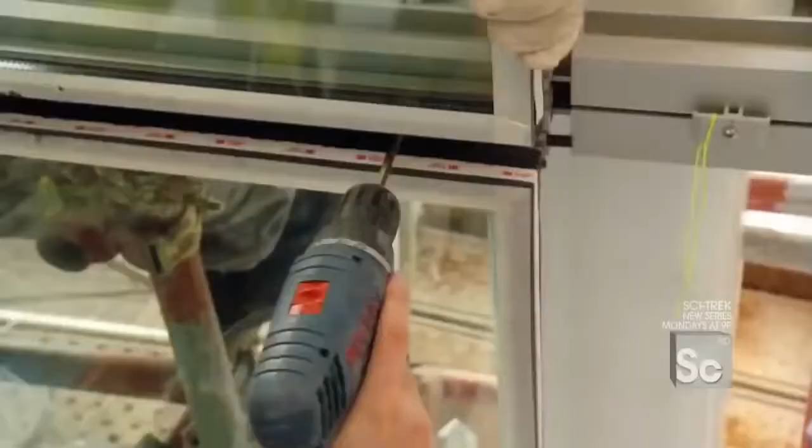All right, so all four sides are locked into place, and this glass panel is now fully supported by the building. So therefore, I'm pulling the plug. Suction is coming off. 3, 2, 1.

Look at that. Nice, huh? Very nice. And his team does this 25 times a day, best partner. In just 6 months' time, this entire atrium will be covered in glass and shimmering with natural daylight.

Okay, it's you and me. Go home. Now go home. And by go home, I mean hang glass the rest of the day.

Up next, racing to finish one of the largest paint jobs in the world. We're gonna use a brush. Yeah, this brush.

After 30 years, Singapore's ambitious downtown redevelopment is nearly complete. Its crown jewel, the $5.5 billion Marina Bay Sands, is due to open in just 6 months, and crews are racing to complete the hotel's complex facade. The glass on the face of the towers is complete, but on the side walls, the concrete remains exposed. So to finish those walls on time, there's another massive job ahead. When you clad the outside of a skyscraper, typically you cover it in maybe some stone veneer, maybe some glass, or maybe some metal paneling. What you don't do is you don't paint it, right? Because if you've ever painted a fence, every couple of years you have to repaint that fence. But here in Singapore, they're so focused on things being clean, so focused on immaculate maintenance, they're willing to actually paint their buildings. So today, I'm going to do something you would never see on an American construction site. I'm going to paint a skyscraper.

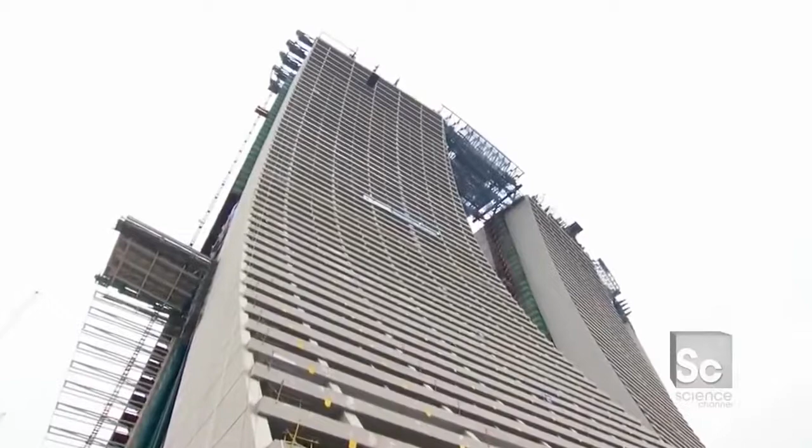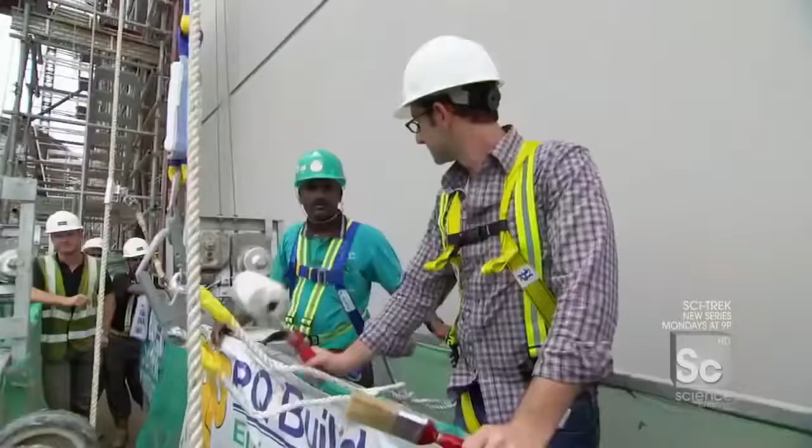Crews will have to paint an area about the size of Mount Rushmore. Muti, I'm Danny. This is going to be one of the single largest paint jobs ever attempted. So I got a bucket of paint, and in order to apply the sophisticated skim coat with the technology, we're going to use a paintbrush. Really, Muti? Yeah, this brush. It's a small brush, yeah? Yeah, small brush, one small brush. Right, and obviously you couldn't do a skyscraper with that little brush. That'd be crazy. So instead, I have a roller, which ought to really expedite the process. Painting fast. All right, well, what more do you need? Muti, away we go.

This wall faces the country's main highway, connecting the airport to downtown. So Muti, you're okay? Heights, no problem? No problem, no problem. And on opening day, with all eyes on Singapore, it's gotta look good. Yeah, okay, so welcome to House Painting 101, Skyscraper Edition. So we're about 200 or so feet in the air.

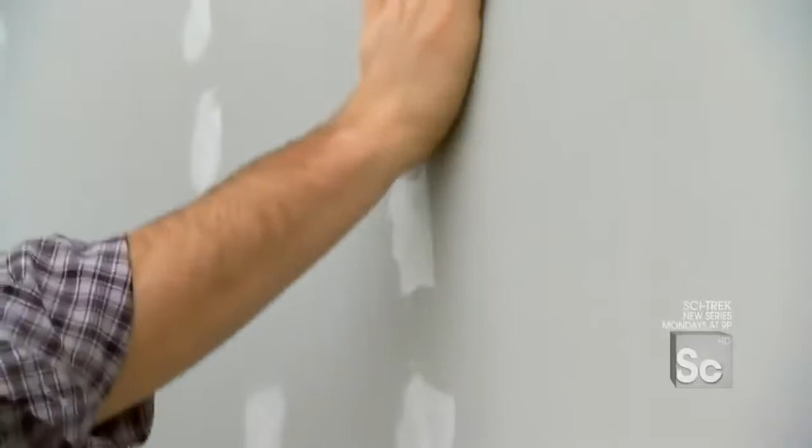We've reached our cruising altitude in a super robust and technologically sophisticated gondola system. What we have to do is fix this wall, which is a mess, with little holes that they patched and filled. We have to have one smooth surface ready to be seen by all of Singapore.

Muti, start with the dark gray first. Okay, first I'm gonna paint within the lines here. The dark gray lines mark each floor of the tower, so you can still see the floor-to-floor separation from afar, giving a sense of scale to this massive surface.

Now that the gray line has been deepened and darkened, we're gonna start painting the building. Nice and gray. I like that Moody's looking over like I'm touching up the top of the Sistine Chapel or something. In total, Moody and the rest of the crew will use more than 2,200 gallons of paint. Moody, how's it look? Does it look good? Yeah, very nice, very nice. Moody's loving it, covering all the tower shear walls in time for opening day.

This project cannot afford delays, because every month the casino is not open, developers give up $100 million in lost revenue. So these crews have been running at top speed since day one.

John, just to put this in perspective for someone who's not used to seeing a project this size, it would take another country a project this big, this expensive, this complex, as much as 6+ years to build. And you guys are on target to complete this in 3 years, half the time. And one of the critical aspects of this project at the moment is getting that Sky Park structure up. Getting the superstructure of that Sky Park done is key to closing up this project and finishing this race.

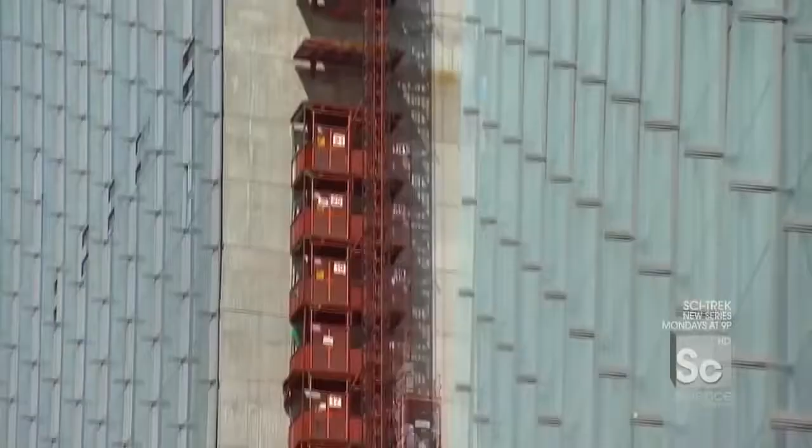But this is going to be a sprint to the finish, because crews up at the top of the Sky Park have only 6 months left to turn this mess of steel into the world's longest elevated pool deck. This is it. This will be the pool deck, and that will be the pool.

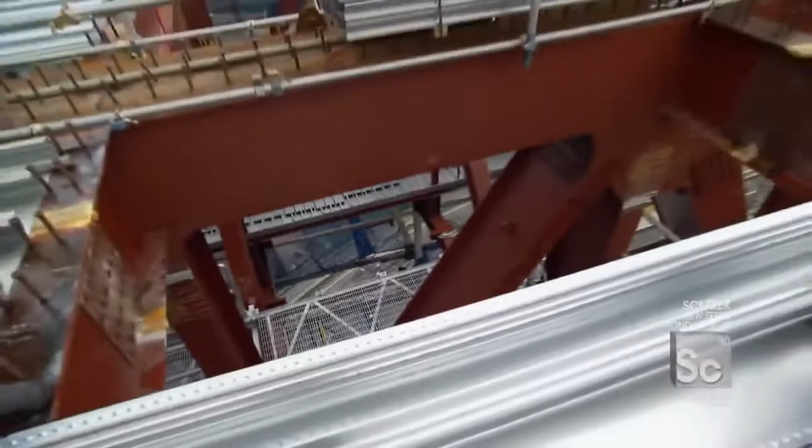But there's a problem, a pretty big problem. You go on vacation, you come to the Sky Park, you see this amazing view of Singapore, and then you fall through a hole to your death. Not good fun on the vacation. So Wilson and I are going to cover it with this aluminum decking. Let's cover the holes, my friend. We're filling in the bridge segments between towers 1 and 2, more than 650 feet up, and there is literally nothing below us but the decking we're about to lay.

Oh, I just got that thing. I just looked down and I saw a car, and it was so little, and my body was like, wait a minute, what are you doing up there?

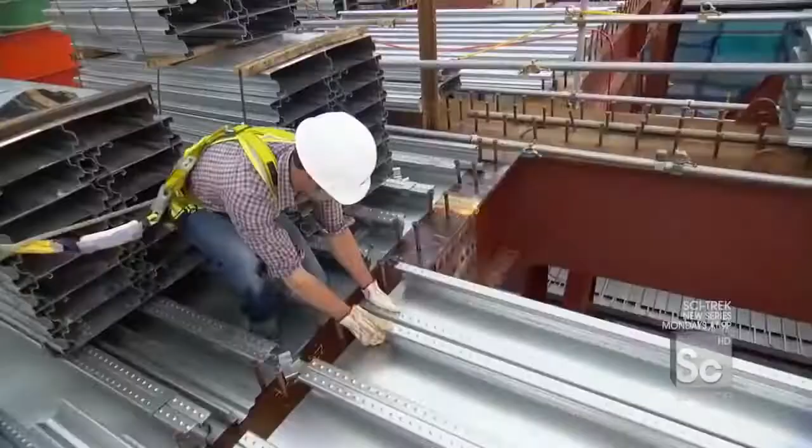All right, Wilson, how do we begin? Step one. Okay, you ready? 1, 2, 3. Okay, stroke in. Pull back, pull back. Good. Put the clip on. Nice, Wilson, next piece, plugging up the hole. Dear God, okay, letting go.

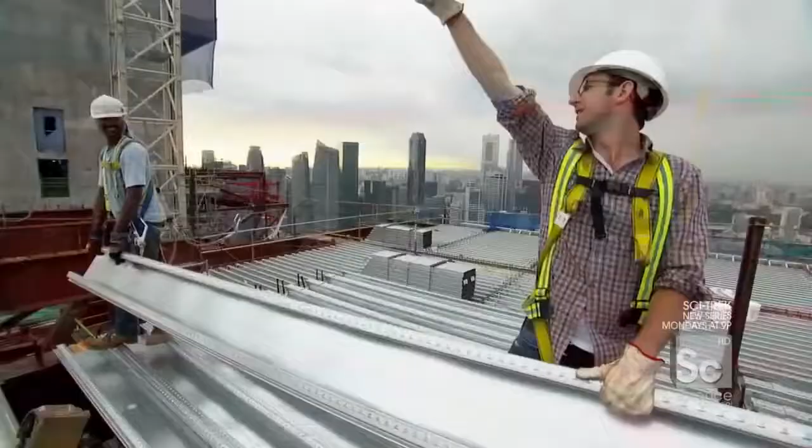With these 10 panels in place, another 125 square foot section of this Sky Park deck is complete. Last piece. Wilson and the rest of the crew will have to lay down 300 panels a day in order to have the entire Sky Park ready for opening day.

Wilson, when the Sky Park is done, people will be swimming right there, dancing on that cantilever, having dinner in that restaurant. But we're not done yet, are we? Come back in 6 months, check out this Sky Park. Me and Wilson will be having a cocktail and enjoying this ridiculous, incredible view. You're buying though, right? Yeah, correct. All right, cool, Wilson's buying, so it's all good.

When the Sky Park is complete and the Marina Bay Sands opens, Singapore will join the ranks of the world's top gaming destinations and fulfill a 3-decade-long quest to reinvent a nation.

For me, the moment when a building actually becomes a piece of architecture is when it transcends its function. Think of the Empire State Building: it's not just about the people who work inside of it, but about the spirit of New York City. The Marina Bay Sands is a project with a hotel, a convention center, and a casino, but in reality, the sum is greater than the individual parts.

This is a project where an architect, an engineer, an owner, and a government have all come together to literally try and reinvent the face of a nation. And I think if you come back here in about a year's time, that postcard picture you take of Singapore is going to look a lot like that.